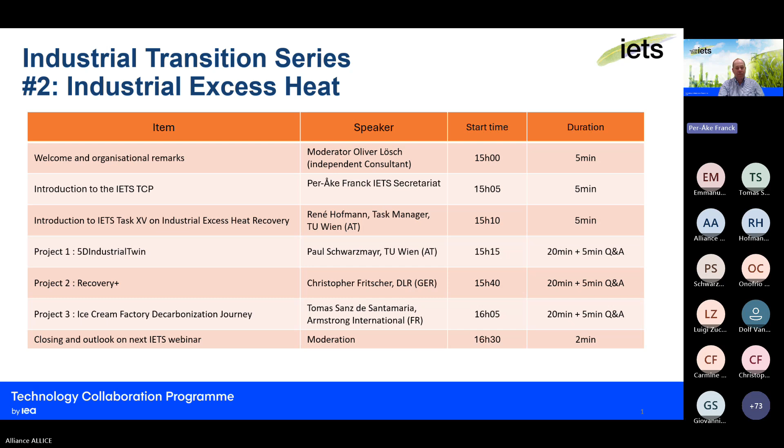Yes, hello everybody. I'm Per-Åke Franck from the Secretariat of Industrial Energy Related Technologies and Systems. Together with me at the Secretariat, Helen Johansson is also active. IETS is an IEA technology collaboration program, which is a global network for industrial collaboration.

The TCPs are a unique network that brings together various groups to support energy efficiency and decarbonization. There are about 40 TCPs under IEA, and we are the only one focusing on industrial application. Our work is organized in tasks, and the tasks are either technology-oriented or system-oriented. For the moment, we have 9 tasks running.

The oldest one is industrial-based biorefinery towards sustainability, which focuses on integrated biorefineries, and ongoing work is to deliver decision support tools. Then we have industrial excess heat, which René will soon go into detail about. Then we come to a technology-oriented task, which is membrane processes in biorefineries, aiming to create biorefinery concepts utilizing membrane separation as a technology to produce biochemicals and biofuels.

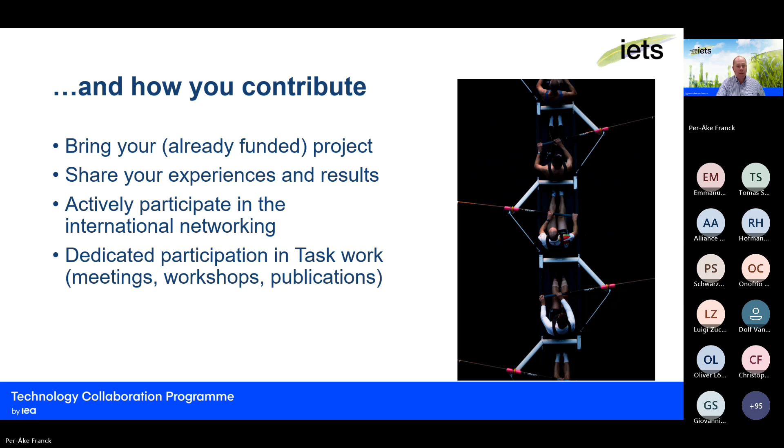The chair is Johanna Mossberg, our vice chairs are René from Austria and Lavinia from Switzerland, and the secretariat is myself and Helene Johansson. Thank you.

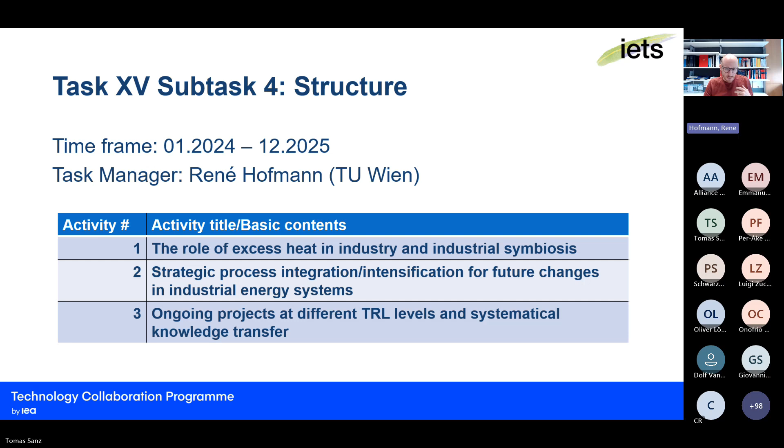So what does this mean? In activity 1, there is the motivation about industrial symbiosis, because this is not only about industry itself, but a fruitful interaction between different sectors. We have demand response, domestic heating, power to heat, power to X, as you know already. And the question is, this is a holistic system, and how our excess heat is also active if the system boundaries change.

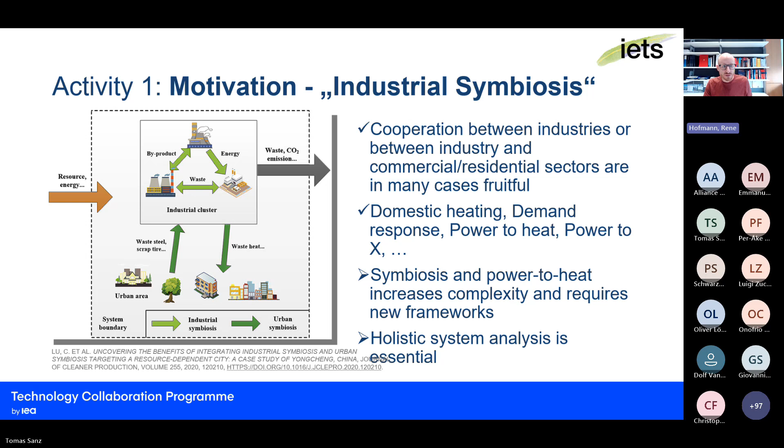The second is the activity about avoiding lock-in effects, because we already know a lot of different process integration methods, meaning pinch analysis and also mathematical approaches. We know there is a rough pinch analysis, meaning we go first through estimation steps and then more into detail. This is very well established.

The question is how to make those technologies or methods available for putting new technologies into the systems, avoiding any lock-in effect, meaning that if the system boundaries change, the question to be answered is: if we invest in a different technology, what does it mean at the end?

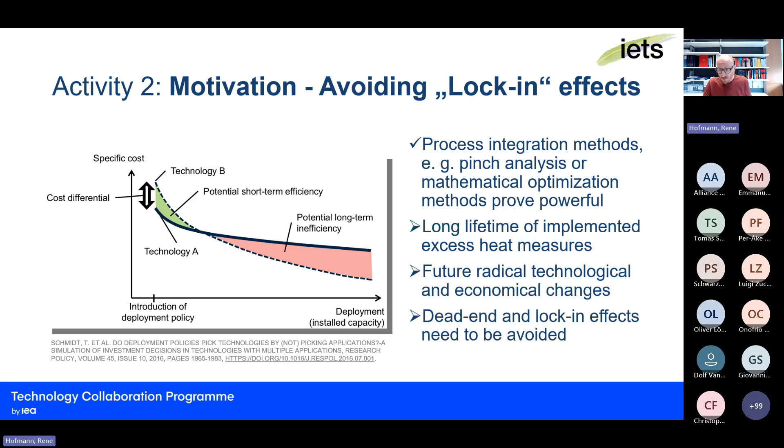Then we have activity 3, which is the systematic knowledge transfer, because this is a 10-year task from the starting point, and we are now in the 3rd phase, meaning we are in subtask 4. That means there are a lot of different projects brought into this activity, and what we are doing is trying to develop a systematic knowledge transfer out of it.

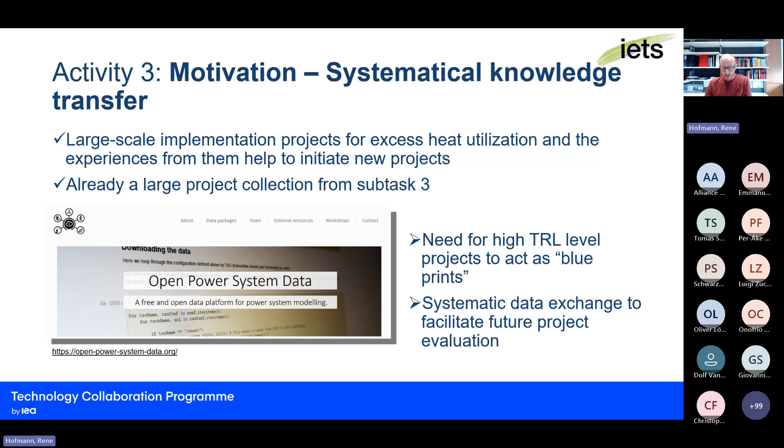We had a midterm meeting with our industrial partner ArcelorMittal in Maizières last March, where we had 2 workshops about uncertainty and risk for strategic process integration, and the introduction to new technologies and systems.

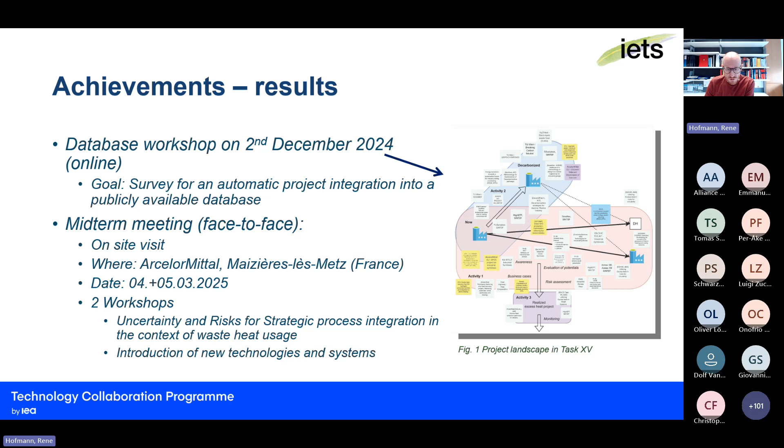So far we have a lot of different achievements, meaning we had project sessions on the project level side, which you can find on the YouTube channel, also available on the webpage, as Per-Åke has shown already at the IETS. We also have an ongoing survey where we are collecting different projects into a database.

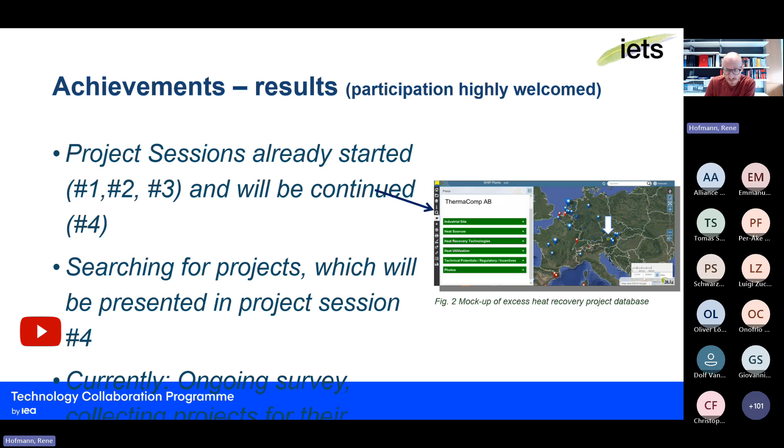And we are planning a workshop at the end, which is in parallel with the 41st ExCo meeting in Vienna in November. Yes, this is it from my side. Thank you very much. If you have any questions, I'm happy to answer.

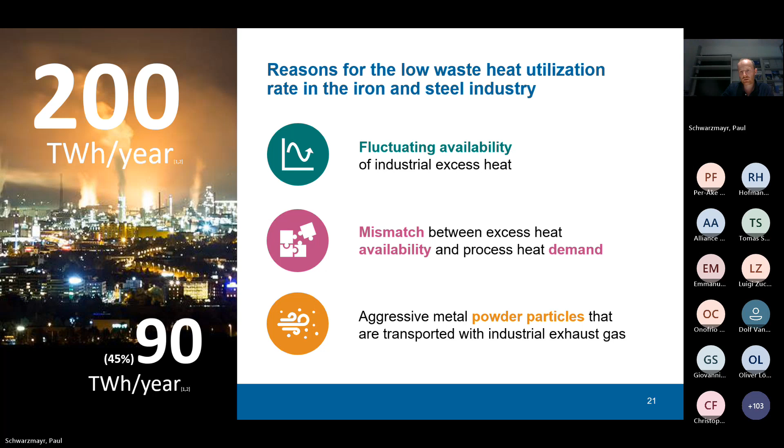You have an excess heat source which is highly fluctuating. Most of the time, for half an hour you have a lot of excess heat, and for half an hour you don't have excess heat, and then this repeats afterwards. This leads to a lot of exhaust gas losses after your steam generator, because it cannot follow this fluctuating excess heat availability.

So what our plan is, is to integrate thermal storage systems into these excess heat or waste heat recovery systems to smoothen out this excess heat availability by storing some of the heat when it is available in the storage, and using this stored heat afterwards to close the gaps when no excess heat is available.

This way you can smoothen your excess heat profile and therefore increase the utilization rate from initially 45% to theoretically 97% of the available heat.

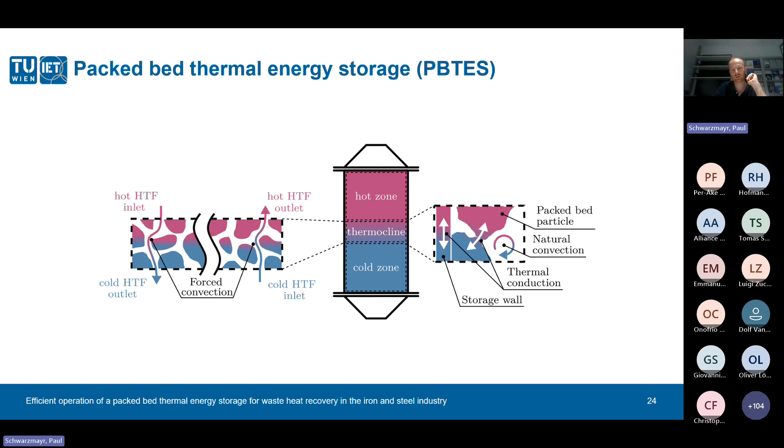So what we did in our project 5D Industrial Twin the last 3 years is we investigated two main things to investigate the efficiency of these packed bed thermal energy storage for waste heat recovery in the iron and steel industry. The first part was we investigated the impact of gas powder two-phase flow on the operation strategies of these kinds of storage if they're integrated in the iron and steel industry.

Secondly, we investigated the thermal efficiency, which is characterized by the thermocline degradation when the storage is integrated in industrial energy systems.

For this purpose we built two different test rigs. The first one was a cold model test rig to investigate the gas powder two-phase aspects, like how much powder deposits during charging, how much powder that was accumulated in the storage in the first place is entrained during discharging with clean air, and whether the accumulation of powder particles inside the storage was uniformly distributed over the whole packed bed or concentrated in some areas.

On the thermal efficiency part, we built a hot test rig. This test rig on the left has a diameter of approximately half a meter and is 2 meters high, and there we investigated the impact of the heat transfer fluid flow direction on thermocline degradation and energy and exergy efficiency.

So we were interested in the question, what happens if, instead of charging the storage from the top and discharging it from the bottom, we charge it from the bottom and discharge it from the top? This was the main research question that we wanted to answer with this test rig.

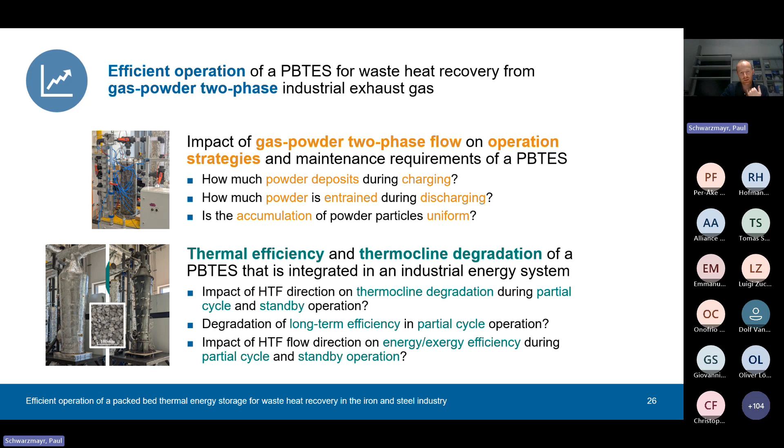Let's directly jump to the first aspect, the gas powder two-phase flow.

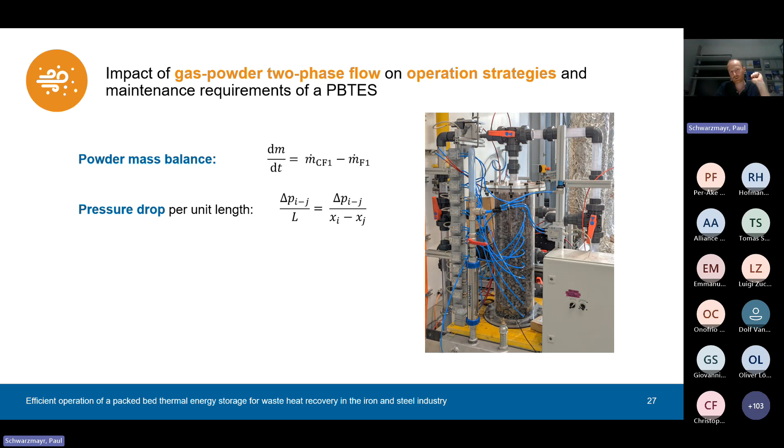We built this test rig to measure the powder accumulation inside the storage, which we did by measuring the amount of powder inserted at the first place, and then the amount of powder found in our filters after the packed bed. With this, we could calculate the amount of powder accumulated inside the packed bed during a charging process. We also wanted to know the location at which these powders accumulated, so we installed a lot of differential pressure sensors to investigate where the most pressure drop happened during charging with gas powder two-phase flow.

The results of these investigations were that when charging with gas powder two-phase flow, actually all of the powder introduced into the system accumulated inside the system, and the cold exhaust gases that exited our storage during charging were basically clean. The same happened when discharging with cold air - basically no powder accumulated in the packed bed during the preceding charging process was entrained by the fluids, so the heat transfer fluid stayed clean during discharging as well.

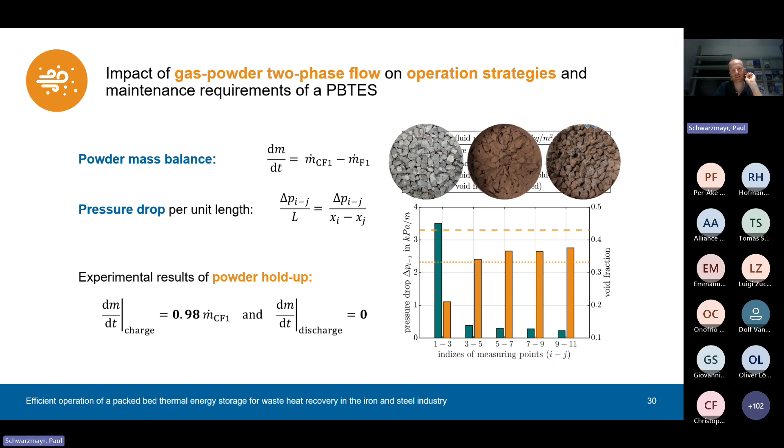We also took some pictures of our investigations on the top. The left picture shows the packed bed from a top view after filling the storage. The second picture shows the packed bed after charging with gas powder two-phase flow, and you see there's a lot of powder accumulated on the top surface. What we did then is we removed the upper part of our packed bed, approximately 10 to 20 centimeters, and there we found what was already indicated in our data - that the rest of the packed bed wasn't quite as contaminated as the top surface, which confirmed our experimental data.

To summarize the findings of our gas powder two-phase flow investigations: we found that 98% of the powder deposited inside the packed bed during charging, none of the powder was entrained during discharging, and most of the powder particles that accumulated inside the packed bed were found at the top surface at which the gas powder two-phase flow entered the packed bed.

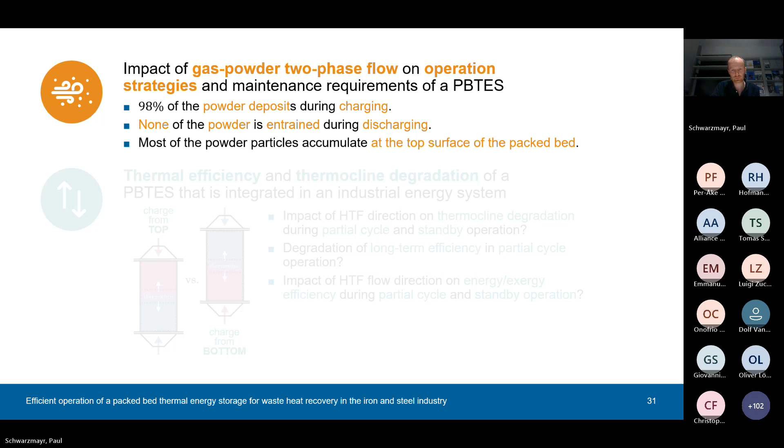That was the gas powder two-phase flow aspects. As already mentioned, we had further research questions to answer concerning the thermal efficiency of our packed bed storage. There we focused on two different operation strategies: on one hand a standby operation, which means you charge the storage once, let it sit for a long time, and then discharge it after, say, one day. The second operation strategy was the partial cycle operation, which means the storage is basically charged to 50% most of the time, and you're just cycling it around these 50%, between say 40 and 60%, in very fast batch processes.

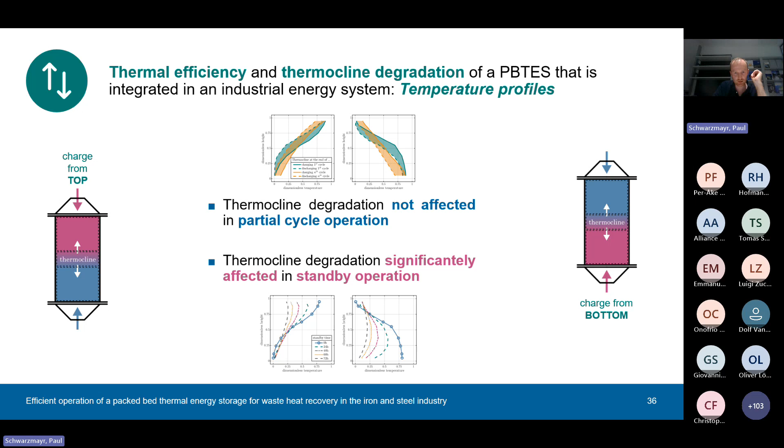So now let me just skip a few slides with too much detail and jump directly to the conclusion of our findings. You already saw the findings of our gas powder two-phase flow experiments, and in the thermal efficiency experiments we found that...

And for the standby efficiencies, the values drop by much higher values, up to 18% lower exergy and energy efficiencies if charged from the bottom.

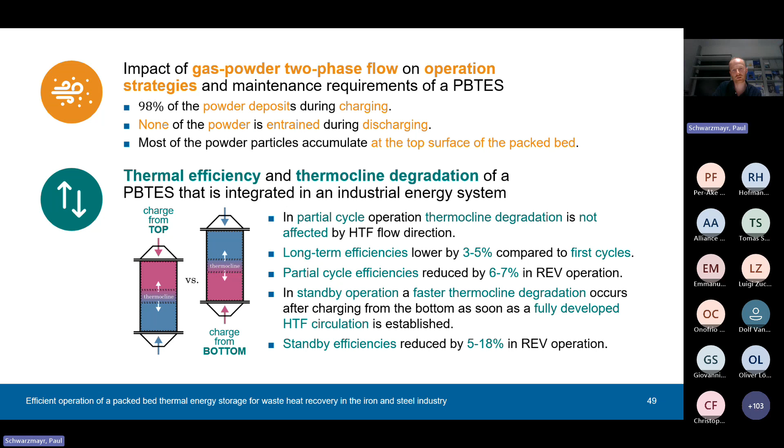So to conclude, we found that our storage does not only act as a thermal energy storage, but also as a dust separator, which is good and bad. We concluded that since the powders accumulate at the surface at which they enter the packed bed, it would be best to charge the storage from the bottom, because then you can use gravity to remove the powders from the packed bed.

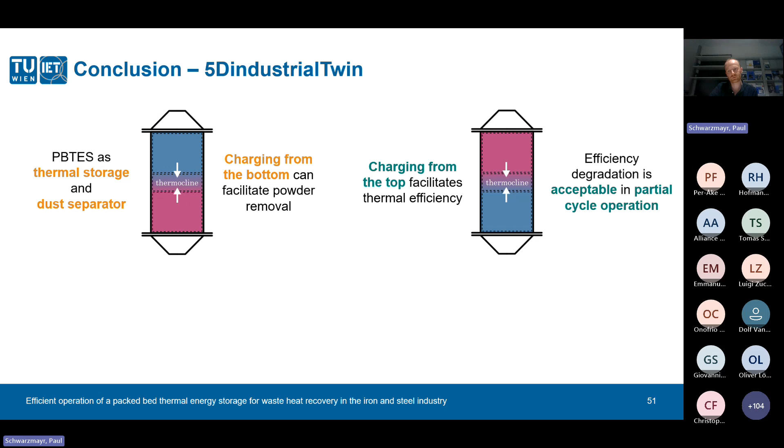However, we also found that, which is kind of obvious in terms of thermal efficiency, it would be better to charge it from the top rather than from the bottom. So we have two aspects that work against each other. Our idea for the follow-up project was to invent a new storage that can do both these things at one time.

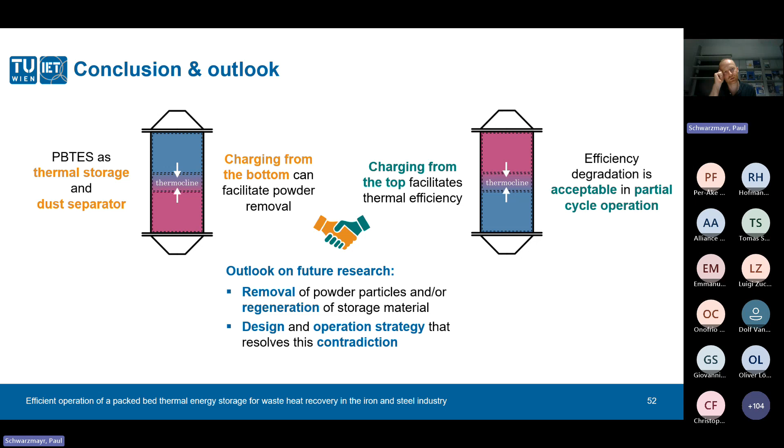What you can do then is charge the storage with hot gas powder two-phase flow. You inject this gas powder two-phase flow from the bottom, entering the packed bed from the bottom as you'd like it to separate the dust on the bottom surface. When the dust is separated in the first half of the packed bed, you divert your gas flow - now basically clean and still hot - and inject it into the outer part of the storage to charge this part from the top.

And when reversing the flow direction, you use cold air to discharge this part from the bottom. It also flows through the middle part and can be used in downstream processes to preheat stuff or to generate steam or anything else. So that's the basic idea we're researching in our new project, to see if the ideas we had actually work in real life.

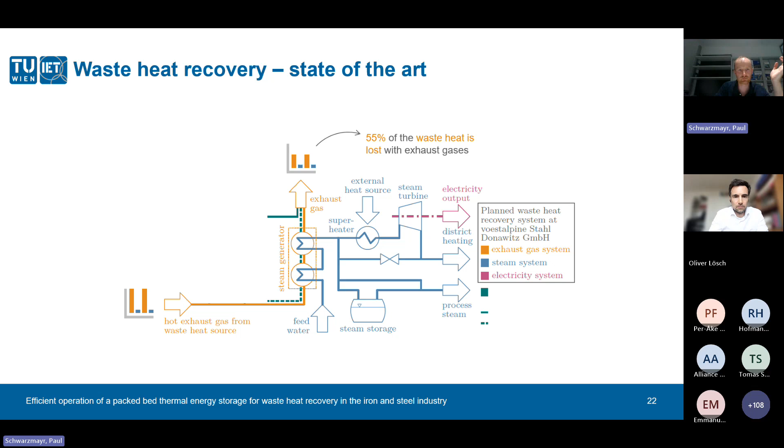On return on investment, I don't have a good estimation right now. But we set up an optimization model for our use case, where we first optimized the excess heat, or waste heat, system. This is an existing system of voestalpine at Leoben Donawitz, where the waste heat utilization rate with state-of-the-art systems was 45%, meaning 55% losses. By integrating a virtual packed bed thermal energy storage, our optimization model yielded a waste heat utilization rate of up to 97%, which is of course an ideal case, but still a significant increase. That's the result of this optimization model, and hopefully an answer to the question.

Thank you so much. Maybe one last one from me: do you have actual plans to go ahead in the direction of a concrete demonstration at a steel plant?

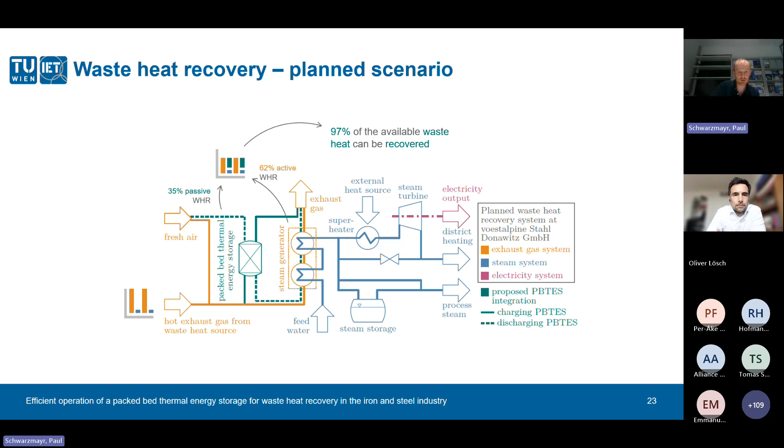Yeah, we actually do. We just started a project investigating the prototype of our new storage that I showed on the last slide. This project will last 3 years, where we try to answer some remaining research questions, like: is the powder separation in this configuration working well? Can we remove the powders in this configuration? There are still open questions, but if the answers in this research project are positive, the next step will be to implement a prototype at our project partner, maybe parallel to the existing waste heat system. But yeah, that's the goal.

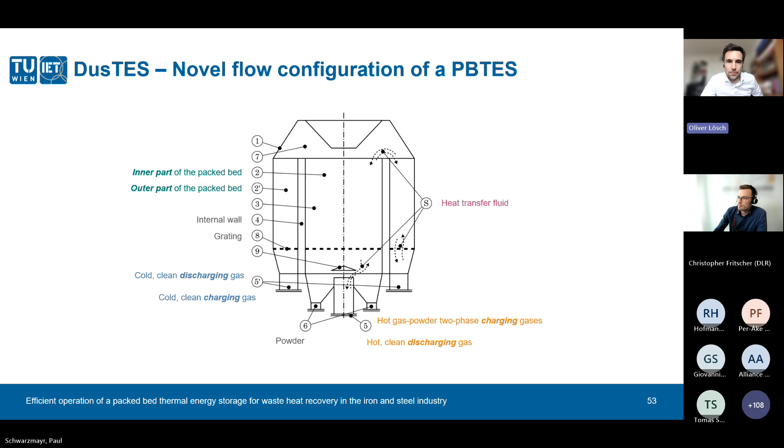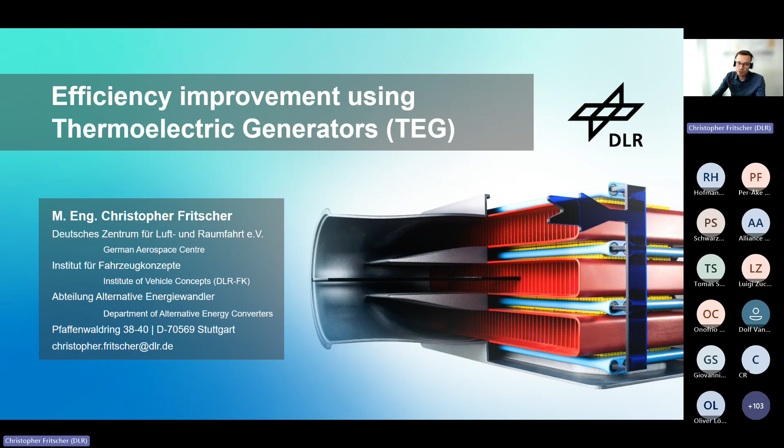My name is Christopher Fritscher. I'm a researcher at the German Aerospace Center for more than 4 years now, at the Department of Alternative Energy Converters, where we investigate if it is possible to improve efficiency by using thermoelectric generators. I studied mechanical engineering, and my responsibilities include structural mechanics simulations, design, prototype manufacturing, as well as experiments on our test rigs.

First, I want to start with a short introduction of the German Aerospace Center. We are a big research organization in Germany, divided into 5 activity fields. We provide research and technology transfer to industry in the sectors of aerospace, energy, and transport, and there are also big interdisciplinary sectors: digitalization and security research.

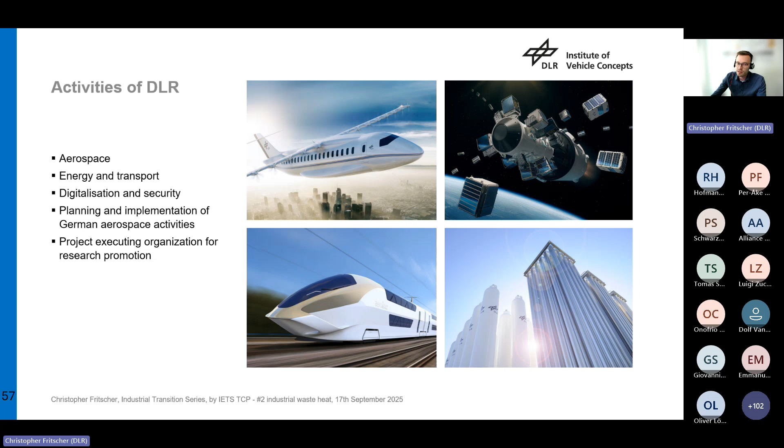Besides that, the German Aerospace Center is responsible for the planning and implementation of German aerospace activities on behalf of the federal government, and an independent project management organization for research promotion also belongs to it. In these 5 activity fields, more than 11,000 employees work at 30 different locations distributed across Germany, but also in Brussels, Paris, Tokyo, and Washington. Our headquarters is located in Cologne, and I am working from Stuttgart.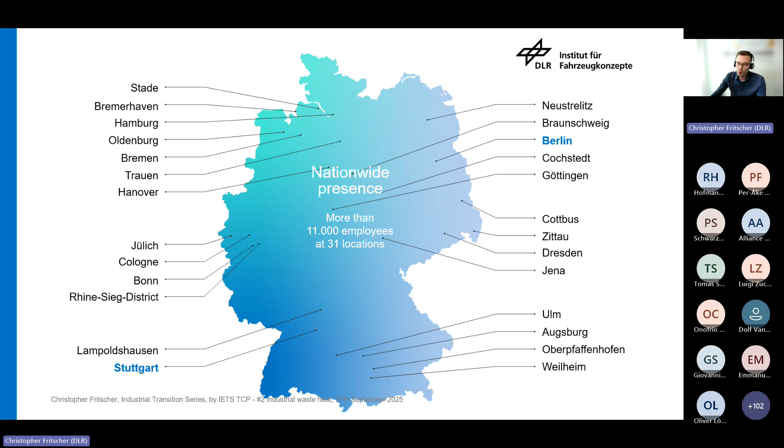But now, let me start with explaining our technology. Have you ever wondered where planet rovers like Curiosity on Mars get their electrical energy from? Because photovoltaics are too sensitive to dust, and because of its size it's not feasible, and batteries are no option because they have too low capacity for the whole lifetime of such a rover, the solution is radioisotope thermoelectric generators.

How do they work? You can see that on the right side. You need heat from a heat source, which is conducted through a semiconductor and dissipated into the environment via cooling fins. In the semiconductor, an electrical voltage is generated directly because of a temperature difference, with no moving parts. In such space applications, thermoelectric power generation has already been successfully used for more than 50 years now.

But nowadays, there are no relevant applications on Earth. I would like to show how it is possible to transfer this technology to terrestrial systems in the next few slides, and clarify if it is efficient to use such a system for industrial applications.

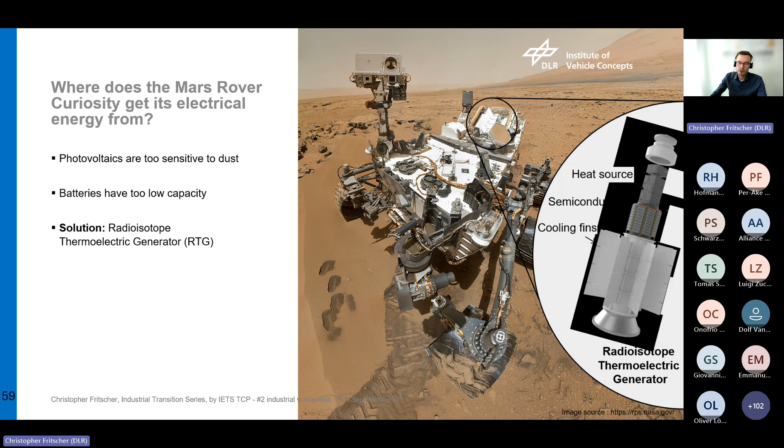The principle behind this, and the reason why it is working, is the Seebeck effect. It says if you heat up one side of a material and cool down the opposite side, you get a separation of charge carriers. Such parts we call a thermoelectric leg.

You can see here in the first figure that the charge carriers are moving downward. That's why at the bottom you can see much more electrons or electron holes, and this is the reason why you get an electrical voltage. You only need a serial connection of many such parts and you will get a usable electrical current.

Such a serial connection of thermoelectric legs is technically realized in a thermoelectric module, which you can see here in the second picture. In a technical system, you realize the required heat flux with different heat exchangers. Heat is fed into this system through the red heat exchangers, then conducted through the yellow thermoelectric modules, which are the same as in picture 2, and the blue heat exchangers return the heat and provide it for further use. This is called a stacked heat exchanger design.

The last figure shows how a prototype of a thermoelectric generator could look like. What you can see is the housing for maintaining an inert gas atmosphere and quite a lot of measurement equipment. All these heat exchangers from figure 3 are located inside this housing.

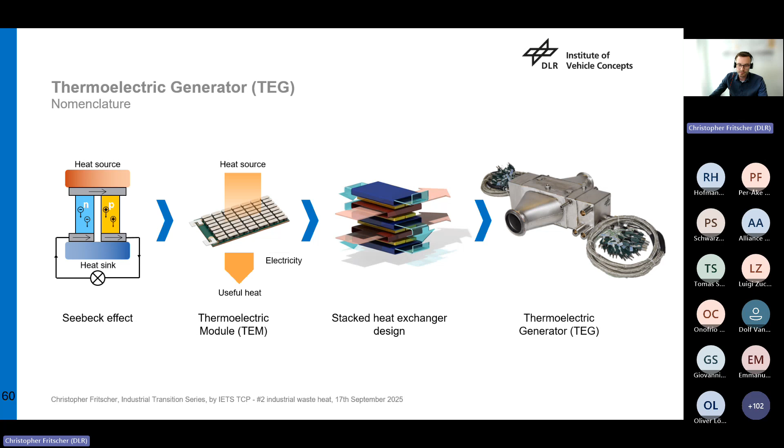What we are working on at the Institute for Vehicle Concepts is shown here in more detail. You can see the whole process from research of thermoelectric material to the integration into different applications. In cooperation with partners, companies, and other research institutions, we investigate suitable material and the fabrication of thermoelectric modules. Our key competence is the designing and developing of such generator systems.

In order for the technology to establish itself on the market for an economic use, we are already looking at how a serial production could look like, and the stability of generator systems. In the last steps, we are investigating the integration into different systems for different applications. In the past, we were already able to show the high potential of an economic use in different real applications.

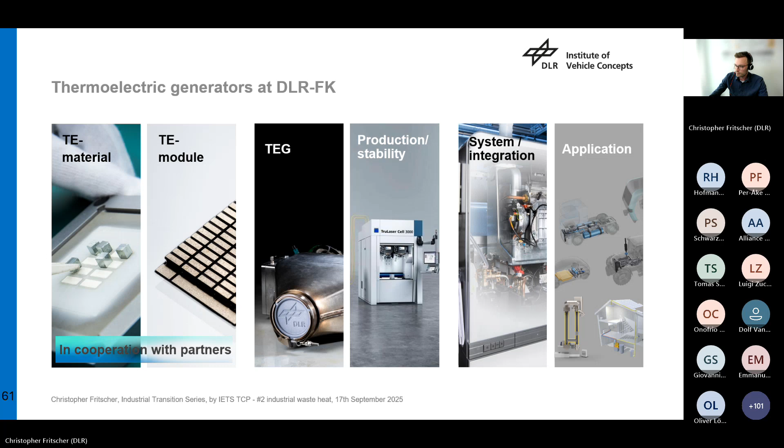The history of the research at our institute is shown here. For more than 20 years now, we are researching different applications of thermoelectric generators. In the first years, our focus was on car applications. Now we are also looking on commercial vehicles and industrial applications. Overall, we developed a highly integrated encapsulated design, and we have completed several full systems. A few of our partners from the past are listed here at the bottom.

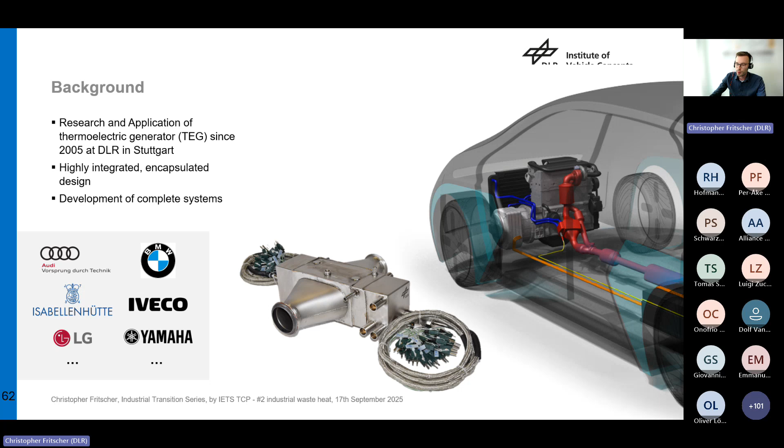Here you can see our progress in the last 20 years. I'm sorry for the few mistakes in the diagram. On the horizontal axis, the years are shown, and on the vertical axis, the power density is plotted. That's the electrical power output in relation to the weight of the thermoelectric generator.

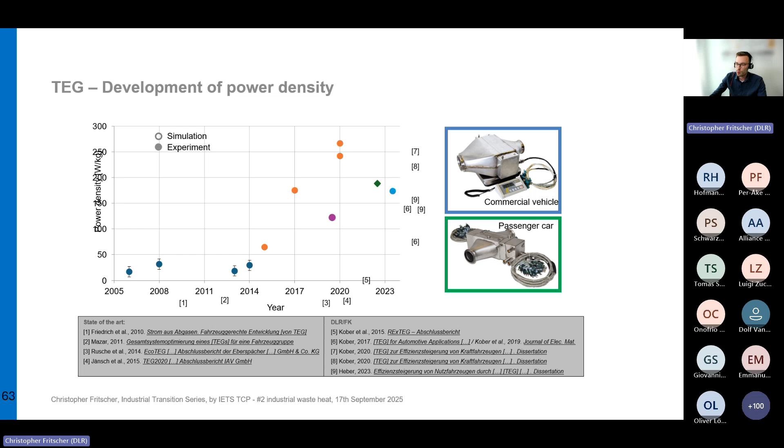Each dot represents a functional prototype of a thermoelectric generator. The ring circles are simulated designs, and the filled circles show real measured results. I think it is really impressive to see that we were able to increase the power density by a factor of 10 over the last years. This is the reason why now it is the right time for this technology.

Now I want to show you one specific application for industrial waste heat recovery. We have recently completed the research project Recovery Plus, which I want to explain to you now. The goal was to investigate the potential of such a generator at a zinc melting furnace.

The heat source is the exhaust gas of a melting furnace, which is operated with natural gas. The technical process parameters show a heat flux of approximately 66 kilowatts thermal heat. That means each year we have waste heat of over 350,000 kilowatt hours. We wanted to make this waste heat usable with a thermoelectric generator.

As heat sink, water from the normal heating system was used. So it was possible not only to use the generated electrical power, but also to use the heat. Instead of directly heating buildings, for other applications it would also be feasible to put the heat in a district heating system, or to use a cold absorption machine, or to use it for process heat.

On the right side, you can see the design of our prototype and how it was integrated in the production plant system. There you can also see a bypass, which is not necessary. It was only installed to minimize downtime in ongoing production during the installation of our prototype, and for any emergency cases.

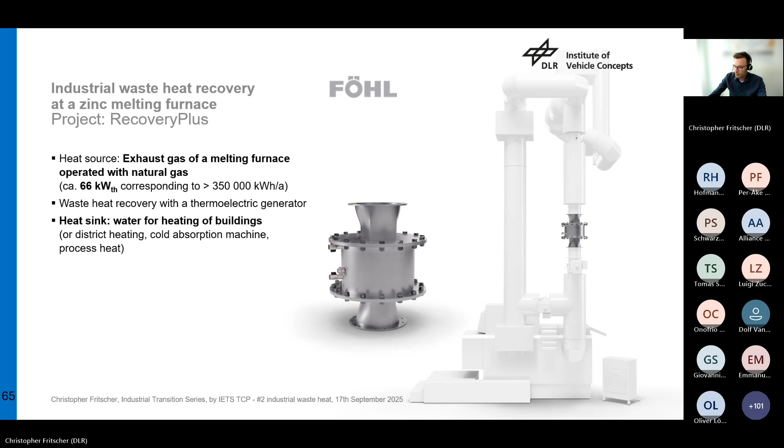Here, a few more technical details. The furnace is used for melting zinc ingots. Our project partner, the company Föhl, needed this zinc for the production of die-cast parts. The exhaust gas has a temperature of 700 degrees.

As I already mentioned, this results in a waste heat flow of 66 kilowatts thermal heat output. The furnace has an operating time of more than 5,500 hours per year, so you get more than 368,000 kilowatt hours of wasted heat. In the figure on the right side, you can see our temperature measurement for analyzing the temperature distribution in the exhaust pipes. This was necessary for developing and designing our prototype of a thermoelectric generator.

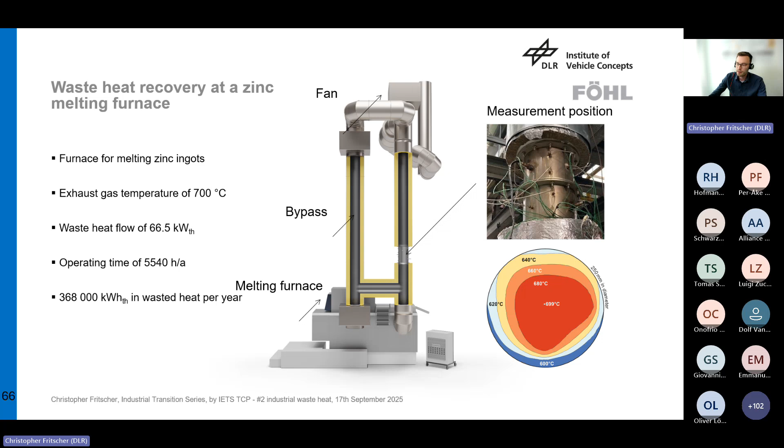So how does the generator work here? Of course, the hot side of the thermoelectric modules were heated up with exhaust gas. And as I already mentioned, the cold side was cooled down by water from the local heating network. So more or less, the thermoelectric generator is just an energy converting heat exchanger.

This you can see also here on the right side. In the furnace, the process heat is generated. This heat is on the one hand used for the melting process, and the rest of it, all the waste heat, is carried to the thermoelectric generator.

Here, a large percentage of the heat is provided as usable heat for water heating. Another option would be to use the heated water for steam generation or reuse it for process heat. And of course, part of the heat is transformed into electrical power energy. Because it is not efficient to cool down the exhaust gas to ambient temperature, a certain percentage is released into the environment via the chimney.

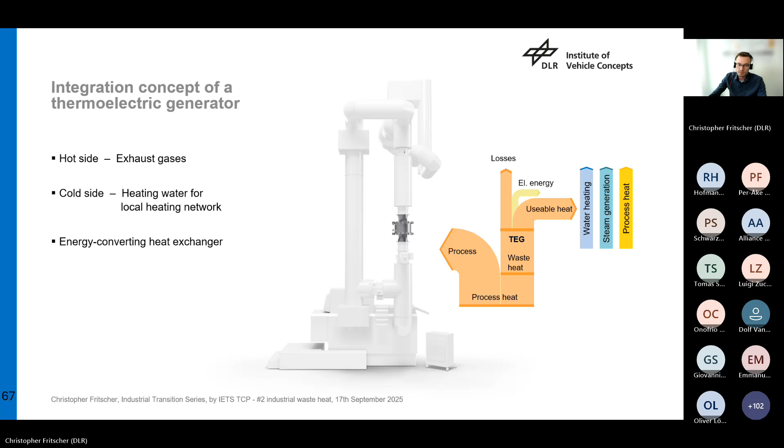Here you can see a photo of our functional prototype at our test bench. At our test bench, we did an experiment to validate the key figures and to compare them with our design and simulations.

On the left side, a hot air mass flow is generated and controlled. At the inlet and at the outlet of the thermoelectric generator, the pressure and temperatures of the airflow were measured. On the top, you can see the blue water pipes, where the mass flow, pressure and temperatures are also measured. In the generator itself, of course, the generated electrical power and temperatures at 60 different locations are measured.

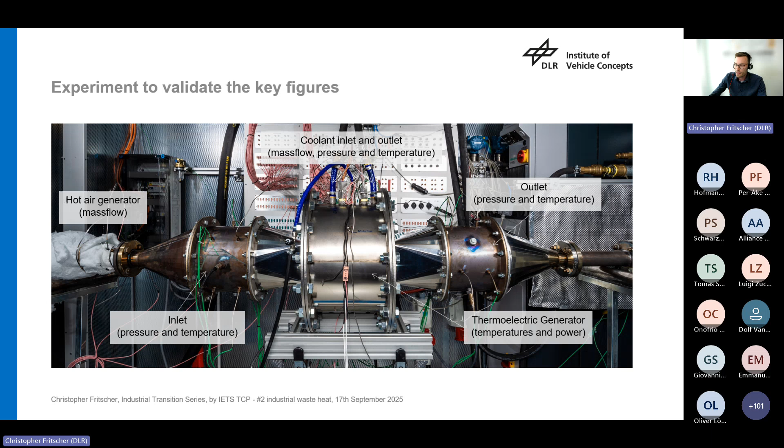Here are the technical data of our generator design. We reach an electrical power of more than 1000 watts. We provide 37 kilowatts of heat as heating water. The electrical power generation leads to more than 5,600 kilowatt hours per year, and the heat recovery leads to a heat saving of more than 205,000 kilowatt hours every year.

That means with the integration of this generator, you can save costs of more than 5,000 euro each year. And the manufacturing costs are less than 5,800 euros. For the calculation of the manufacturing process, we have assumed a production quantity of 100 pieces each year.

So we reach an amortization period of much less than 3 years and a reduction of CO2 emissions of over 35 tons each year. Just a little note: in the future, significantly higher electrical power output seems possible. In this research project, we were a bit restricted regarding the availability of thermoelectric modules, and we were able to identify some potential for improvements. Nevertheless, I would say these achievements are quite impressive.

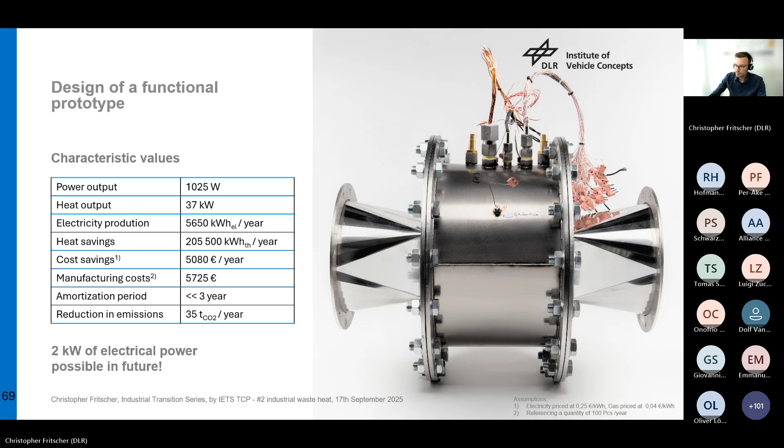Now I want to compare these results with other technologies. For example, for the same electrical power output in one year, you would need a big area for photovoltaics, because photovoltaics don't work at night, or if there are too many clouds. You would need a rectangle of 7 by 10 meters for the same power output. So if you compare it, the size of a thermoelectric generator is much smaller.

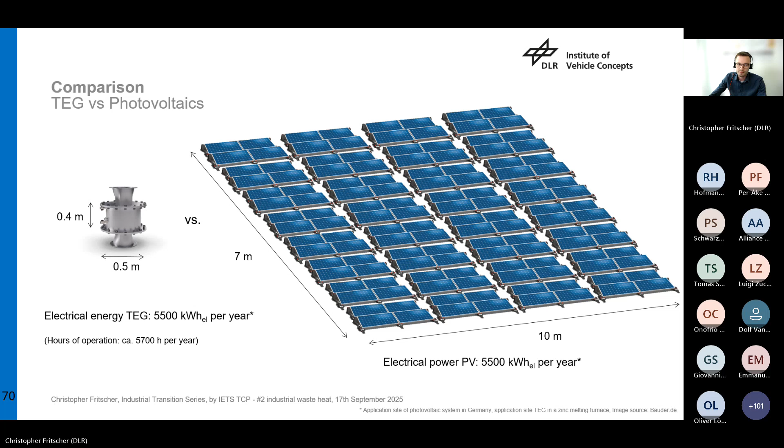After testing this prototype at our test bench, we had installed it at the industrial zinc furnace. So we generated real savings of costs and emissions at this company. And of course, it was a research project, that's why we identified further development potential. Here on the right side, you can see a few impressions from the installation.

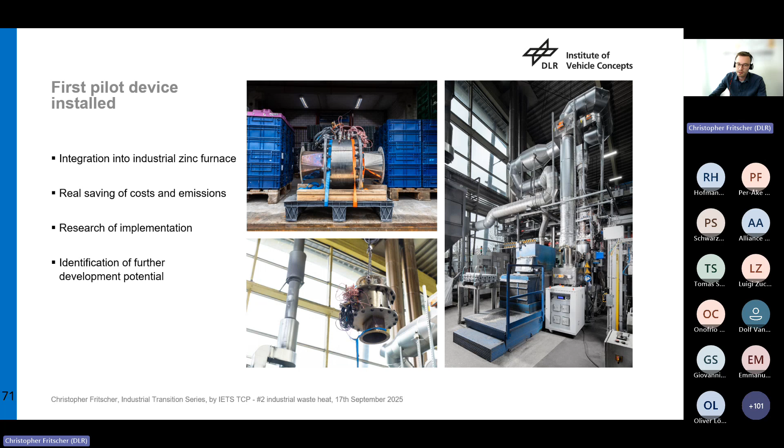To summarize and show the general potential of this technology for future applications: at a water outlet of the generator, we were able to provide a thermal power of 40 kilowatts heat. We reached an overall system efficiency of 3%, if you just look at the electrical power output. And like I mentioned, with a few little improvements, a significantly higher efficiency up to 6% seems possible, which would result in 2 kilowatts electrical power.

Altogether, we predict system costs lower than 4 euro per watt electrical power. Here, just the electrical power output is considered. Providing the heat is an additional benefit, which would improve the system costs.

Now I want to compare it to another heat recovery system, the organic Rankine cycle, which is already widely implemented in industry. The most difficult part is that today no systems are available for such small heat quantities. That's why you can see here values for small organic Rankine systems with 100 kilowatts and bigger systems with 500 kilowatts thermal power. The system efficiency for small systems is only slightly higher than the efficiency of thermoelectric generators. For bigger organic Rankine cycles, the efficiency increases.

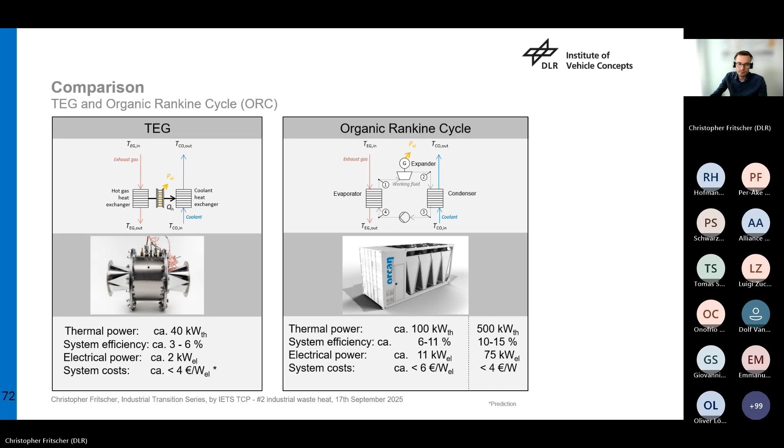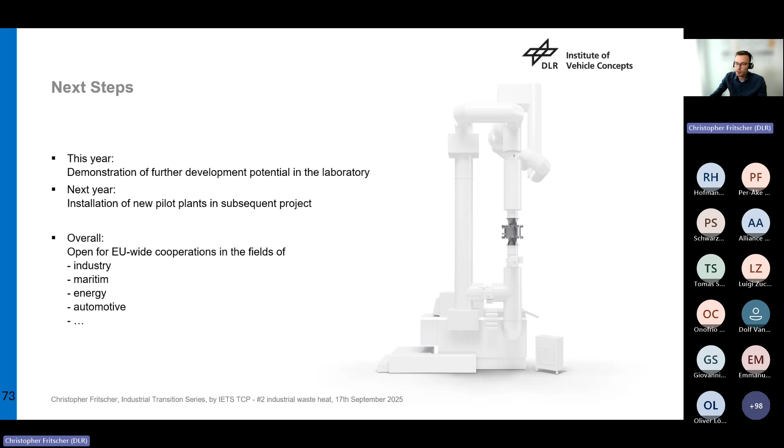What are the next steps for us? This year, we want to demonstrate the development potential in the laboratory, and for next year, the installation of several prototypes in new pilot plants is planned. This is part of a subsequent project where we want to show the potential of this technology for several stationary applications. Overall, we are open for new collaborations in very different sectors for future research projects.

And my most important message for you: thermoelectric generators are an economic solution for industrial waste heat recovery, especially for small volumes of heat, maybe even for higher amounts. It is the best technology on the market.

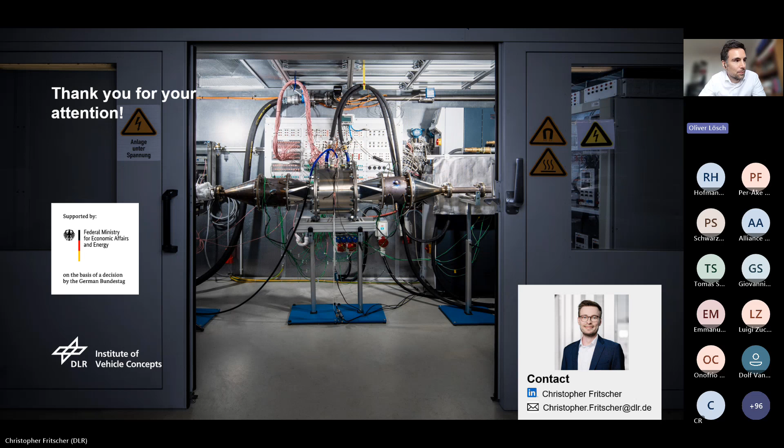Hello, everyone. Thank you very much for having me, and thank you to my colleagues. All their presentations have been very interesting. Now I'll introduce myself quickly. I am Tomas Sanz de Santamaria. I'm a thermal engineer, a Colombian living in Paris, and I have around 10 years of experience in heating and cooling systems. This is me in our factory in Stuttgart in front of our heat pump, one of our test heat pumps, which I'm going to talk about in a bit.

I work for Armstrong International. It's a company founded in the USA in 1900, 125 years ago, and we're a solution provider on thermal systems. We're also a heat pump manufacturer through our joint venture with Combitherm, which is a German company based in Stuttgart.

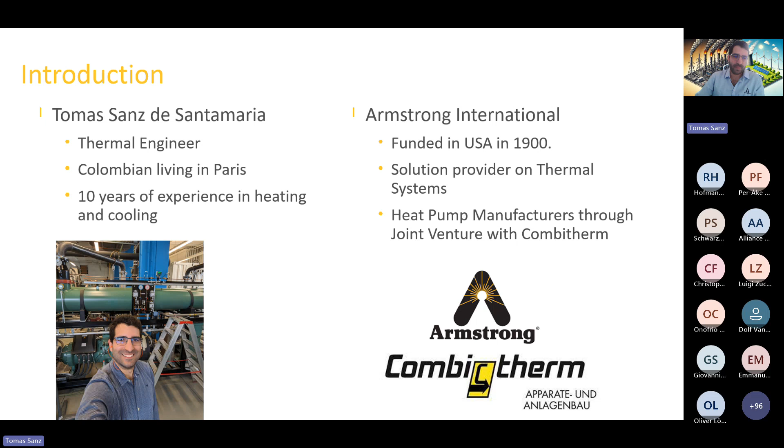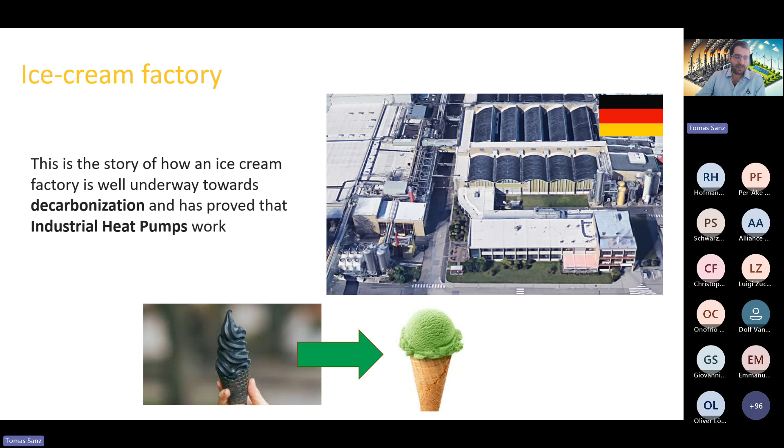Today I want to tell you the story of how an ice cream factory is well underway towards decarbonization, and it has proved that industrial heat pumps work. This ice cream factory is in Germany, and if you could see in the ice cream all the carbon it takes to turn your ice cream into the delicious snack you take, it would look like that. We want to help them move towards a greener ice cream.

Along the way, they have taken 3 key steps towards decarbonization. The first was to fully de-steam their system, and they turned into a hot water loop at 105 degrees. A while ago, they had their steam boilers providing all the heat for their users, and they switched to hot water. This was very important. You're going to see in a while why.

Then they also did direct heat recovery wherever possible. This is something every factory should strive for, to try to do direct heat recovery in their processes. And the final step, which is the one we're most proud of because it's the one we helped them do, was to install their first heat pump. Here's an image, the red box there next to the hot water tank, and the image on the right is the inside of the heat pump with the compressor.

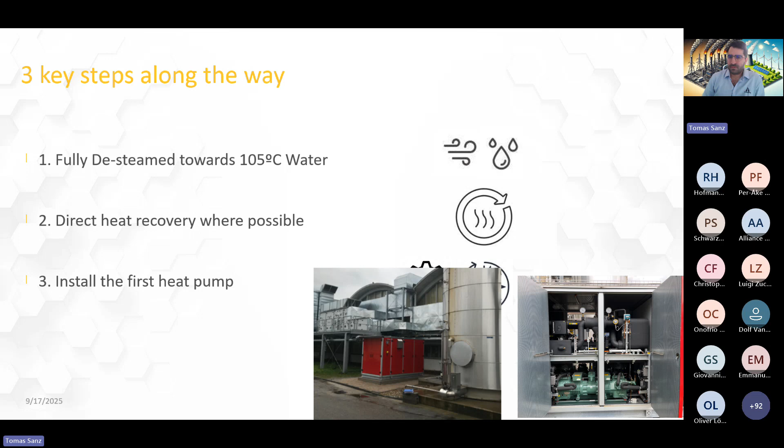So they installed it about 3 years ago, and about 5 years ago, and it's been running since, and they're very happy with it. But something that triggered the de-steaming, which was the first good thing that they did, was the installation of a combined heat and power system.

Many of you might think that this might be a step in the wrong direction. They were going to increase their gas consumption to produce electricity and heat. This would be the Sankey diagram of the system before installing the combined heat and power. They would take in gas, burn it in the boilers to produce steam for their users. And parallel to this, they would get electricity from the grid and use it in their users.

After the installation of the combined heat and power, they increased their gas consumption, part of it to the boilers, part of it to the combined heat and power to produce heat and electricity, which led to a reduction in their electricity purchase from the grid.

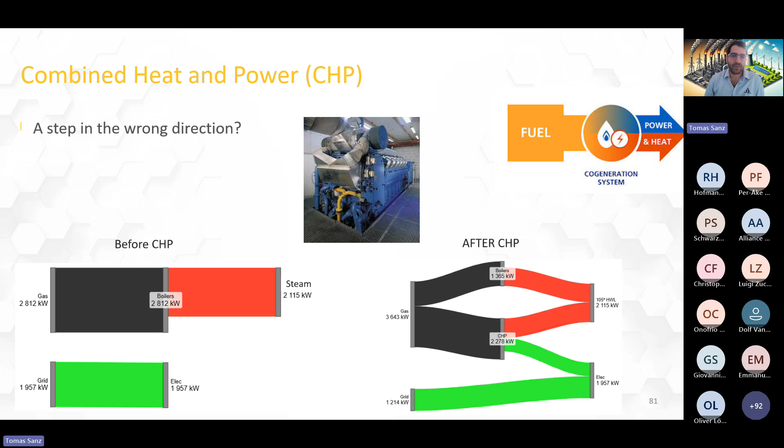But something that we need to remember is that in 2008, when this CHP was installed, the carbon intensity of the electricity grid in Germany was very high. It was 525 grams of CO2 per kilowatt hour. As reference, natural gas is 200 grams of CO2.

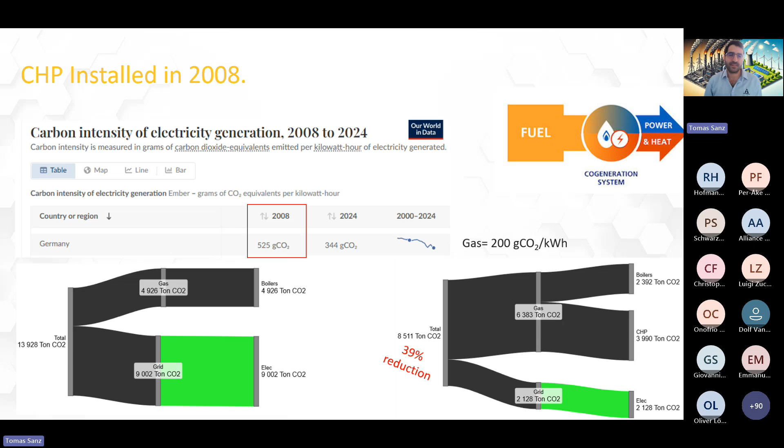So if instead of energy, we look at CO2 emissions, the total site consumption or site emissions were about 13,000 tons of CO2, part of it linked to the gas consumption of the boilers, but a big part linked to the electricity consumption of the grid. After the combined heat and power was installed, the grid consumption decreased, and yes, the gas consumption increased, but the total CO2 emissions were reduced by 39%.

And there were some unexpected benefits of installing the CHP. First of all, they de-steamed, because before the CHP, there was steam, and they said, okay, which combined heat and power system should we buy? One that produces steam or one that produces hot water? They noticed that the one that produces hot water has better efficiency because the return temperature of the water reduces the temperature of the fumes. And they said, okay, let's go for it.

And there are, of course, some other benefits to it, because when you remove the steam from the system, you reduce part of the maintenance because you have less steam traps to maintain, and the losses due to radiation are less because the temperature of the pipes is less.

Another unexpected benefit is that because of the German subsidies that they would get, they were having to shut down the CHP every so often because they had some excess heat that usually would be used for heating water. And because they were not being able to use all that heat, it would have to shut down. I'm going to explain this a little bit more in detail in a bit.

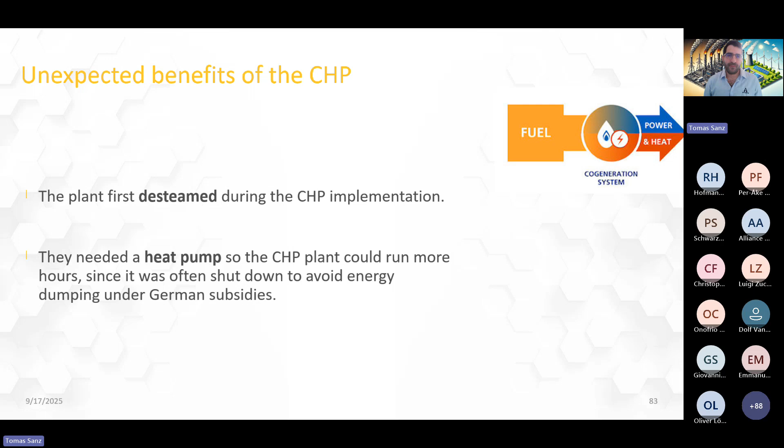Before that, let's take another look at the other step that they did. We talked about the de-steaming. Now let's talk about the heat recovery. As you can imagine, an ice cream factory demands lots of cooling. At the end of the day, you have to freeze your ice cream.

And for those of you who are not familiar with refrigeration systems, I'm going to do a quick recap. The heart of the system is the compressor, which is absorbing refrigerant, in this case ammonia, from the evaporators. It goes out very hot, passes through the cooling towers, the condensers, comes out as liquid, enters the evaporators again, gets evaporated, and then is absorbing all the heat from the factory.

Now, these systems are installed everywhere. In many factories, you'll see them. And here there are three main points where you can recover heat. Two points which are high, or let's call it medium temperature. The desuperheater, where you take the refrigerant that is coming out of the compressor at a very high temperature, and you can reduce its temperature without starting to condense it. You can also recover heat from the oil that is used to lubricate the compressor. So these two systems are, let's call it medium temperature heat recovery, between 50 and 70 degrees.

And then there's a lot more heat. There's more amount of heat, but at lower quality, lower temperature, which is the condensation of the ammonia. Most systems condense the ammonia with ambient cooling at around 20 or 30 degrees with cooling towers, but you can also put a heat exchanger and get a water loop at around 25 or 30 degrees.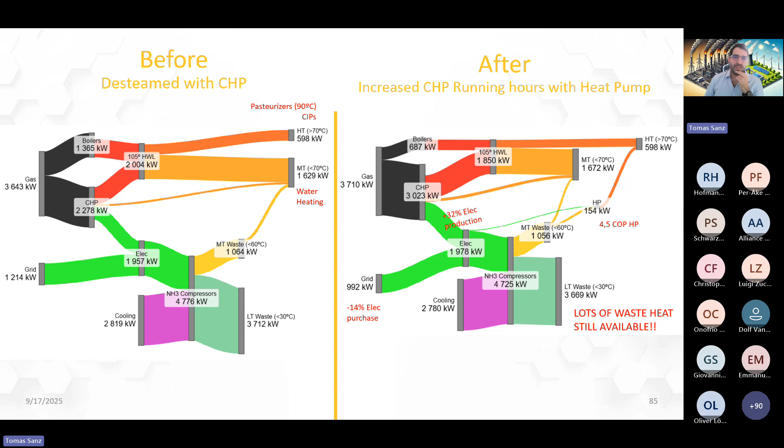Before that, let's ask ourselves the question: this heat pump was ordered in 2019, about 11 years after the CHP was installed. Did it still make sense in terms of CO2 to install this heat pump and increase the operating hours of the combined heat and power? Germany had gone a long way, from 525 it went down to 390 grams of CO2 per kilowatt hour of electricity.

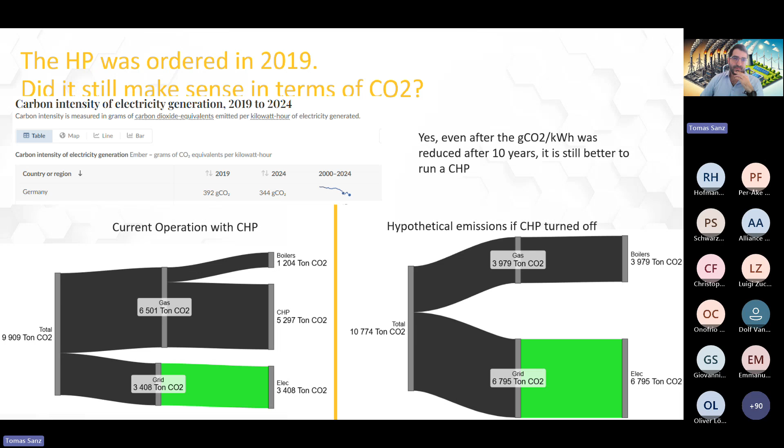But if we do the same exercise we did a bit ago, we see that the current operation with CHP still has less emissions than if we had switched to only boilers. Only boilers would make an increase in CO2 - very little, where the carbon intensity is going down in such a way that it's very close to not needing to run. And in fact, this is what happened recently: the factory established a green power purchase agreement, making their grid electricity now 0 grams of CO2 per kilowatt hour. With this, it doesn't make environmental sense to keep running the CHP and keep burning more gas.

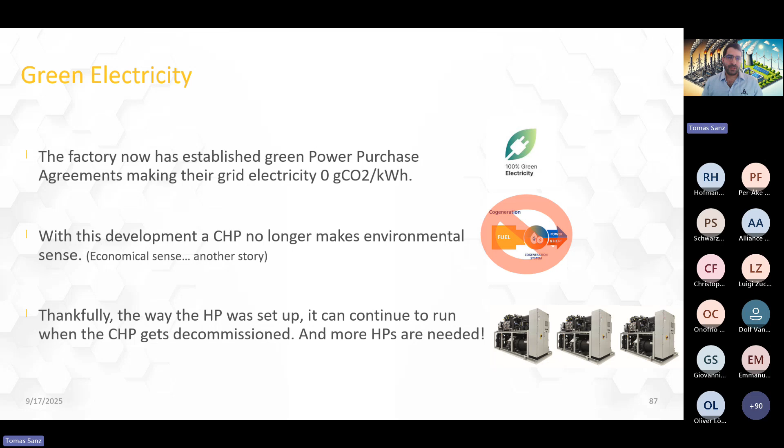Economical sense is another story, because electricity prices and gas prices are what would drive this decision. Now that this electricity is greener, we could turn off the CHP, and the way we set up the heat pump, it can keep taking heat from the ammonia coolers and not the CHP, so it could continue to run. And we can now install more heat pumps to fully decarbonize the site.

So going back to how we're running today, before decarbonizing in the future, we have it like this. And our proposal to the site is to move to this. Isn't this beautiful? No black gas lines, only electricity, green electricity. The electricity would come, feed the ammonia compressors, which do their cooling as they have to, provide the medium temperature waste heat and the low temperature waste heat. We keep on running the heat pump we already installed.

We would install a new high temperature heat pump, almost the same characteristics as the existing one, which would take the medium temperature waste heat it needs to provide the remaining heat for high temperature needs, pasteurization and everything. We would also install a medium temperature heat pump that would take electricity and the medium temperature waste heat, but the available medium temperature waste heat is not enough for all the medium temperature needs. It would need to take some of the low temperature waste heat, which is at less than 30 degrees.

Which is why the COP of this heat pump is not as good as the one from the high temperature. High temperature is at 4.5 and the medium temperature is at 3.7. And still, there is lots of waste heat available. If the site wanted, it could eventually add another medium or high temperature heat pump and sell the excess heat to a district heating system or something like this.

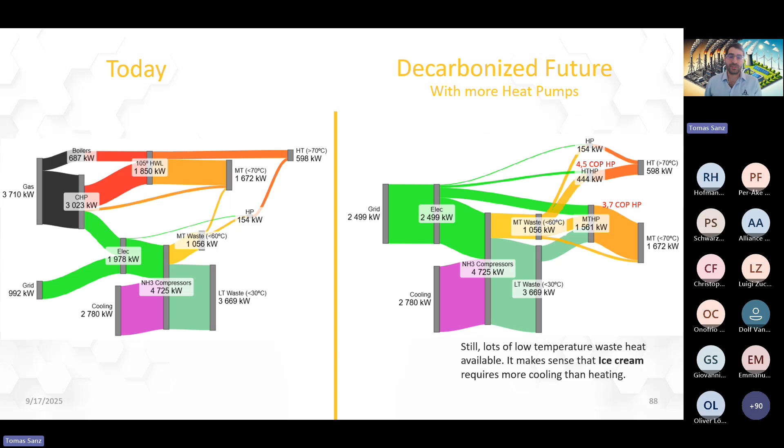Now let's zoom in a little bit on the heat pumps themselves, and talk about their technology and their operating limits. This is what we call the operating envelope for our heat pumps. We have several, but two main working fluids. We work with HFOs, and this is the R1233, which is capable of reaching 120 degrees on the hot side, but it can only cool down to around 35 degrees on the cold side. So this is the operating envelope it has. This is the temperature of the heat source, and this is the temperature of the heat sink. The high temperature heat pump we saw in the example previously would be operating around here.

It was producing 90 degree water, and it took as source water at around 60 degrees. The medium temperature heat pump is operating around here. It was taking water at around 25, 30 degrees because it had to tap into the low temperature waste heat, and it was producing 70 degree water.

The COP, something moved a little bit here in this graph. I'm sorry about these weird lines, it was not like this in my presentation. So ignore these diagonal lines.

This is the COP of the heat pump, depending on the leaving water temperature of the condenser, the hot part, and the leaving water temperature of the evaporator, the cold part. As you saw initially, the site was working with a 105 degree hot water loop. So if we had wanted to produce 105 degrees here, with the source that we had, which was around 60 and 45, we would have a COP which is not that good, around 3.7.

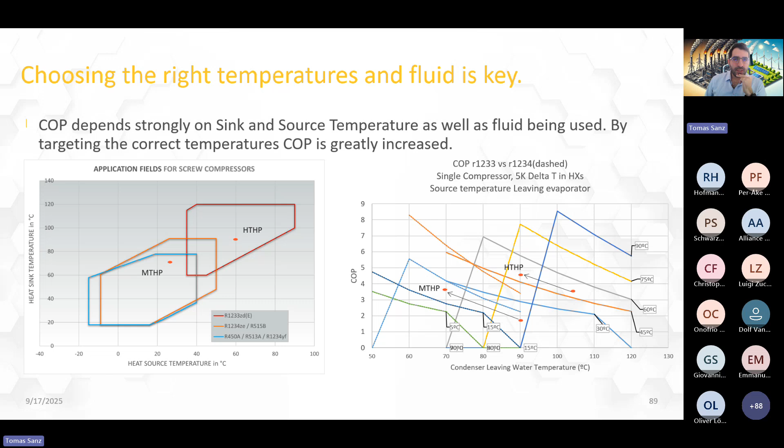And it's a shame that this diagram is not the one I have, because the one I have has dashed lines for the R1234 refrigerant and solid lines for the other one. So yeah, something went wrong here in the passing from one part to the other.

Now, this factory in particular didn't need steam, which made things a little bit easier. But if the site had needed steam, we still offer a solution to produce steam with these high temperature heat pumps. As you saw in the previous slide, our heat pumps can reach up to 120 degrees in the condenser. If we take this 120 degree water and pass it through a steam evaporator, we can produce low pressure steam up to 0.7 bar. And if we need higher pressure than that, we can pass it through a steam compressor, a mechanical vapor recompression system. We don't make those ourselves, we make the heat pumps and the steam evaporators, but we work closely with some third parties to integrate the mechanical vapor recompression and go up to 180 degrees Celsius steam, up to 4 tons per hour.

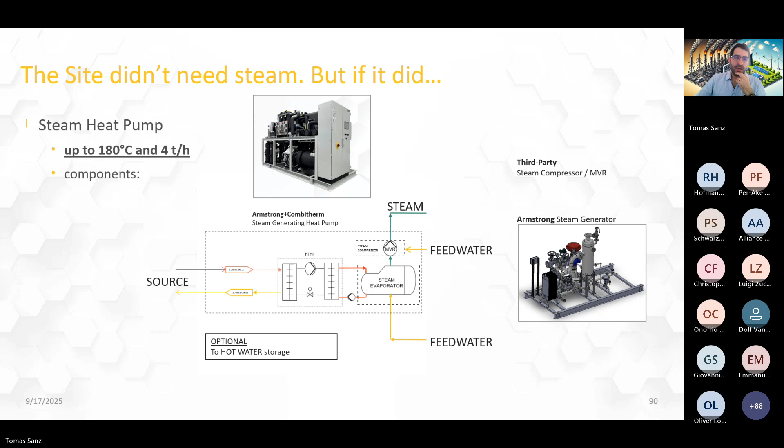So in conclusion, this factory now knows firsthand that these heat pumps work, have had these heat pumps running for 5 years, and are making gas savings and allowing their combined heat and power to run more. But each factory is different, and careful engineering needs to be done for correct integration. Sadly, I have seen in other factories heat pumps that were bought, but since they were not correctly integrated, they were just not running.

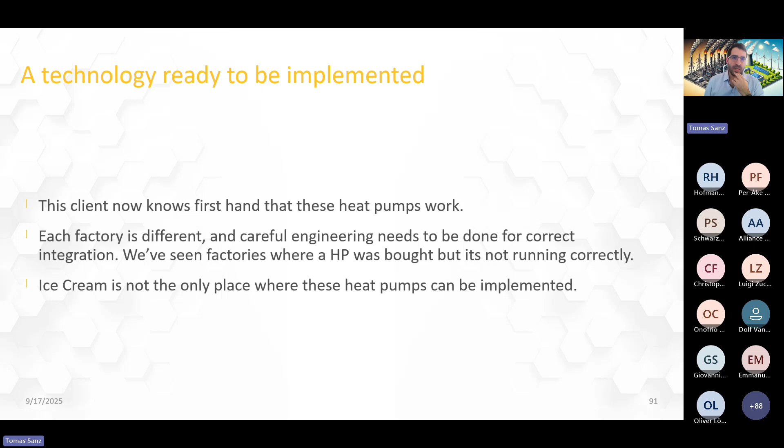And another point, ice cream is not the only place where these heat pumps can be implemented. I'm going to show you a couple of examples where we've installed them.

Cargill, which produces food for fish, for salmon, in Norway, integrated our heat pumps in their dryers. They have to dry the food. There's a really cool video on YouTube if you look for it, with more information about this project. Basically, they're taking the exhaust air from their dryers, which comes out humid and hot, and they need to heat it up usually with 120-degree water.

So we took the exhaust air as a source. We cooled it down with a 50 and 40-degree water loop, and the condensate would then go out a little bit colder into the atmosphere. The heat pumps then would consume a little bit of electricity and bump up the temperature in this hot water loop to 120 degrees and be used to dry the food.

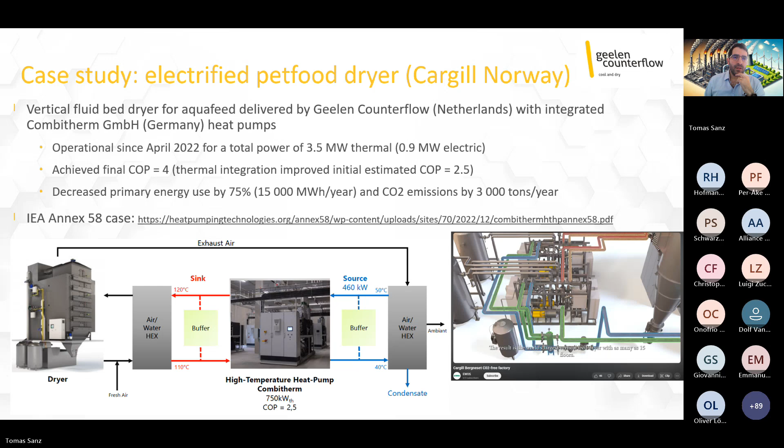Another integration we did was in a pharma company that needed to heat up their water for injection. Water for injection is the water that ends up in these little bags that you might get in your IV. As you can imagine, this needs to be very sterile to avoid any possible infection in the patients, and they need to keep it very hot at around 95 degrees to avoid any possible contamination.

They also have chillers on site used for cooling the production rooms. So we took the excess heat from those chillers, from the condenser of those chillers, fed it into our heat pumps. They installed 3 of them here, and it produced the hot water to keep the water for injection circuit hot.

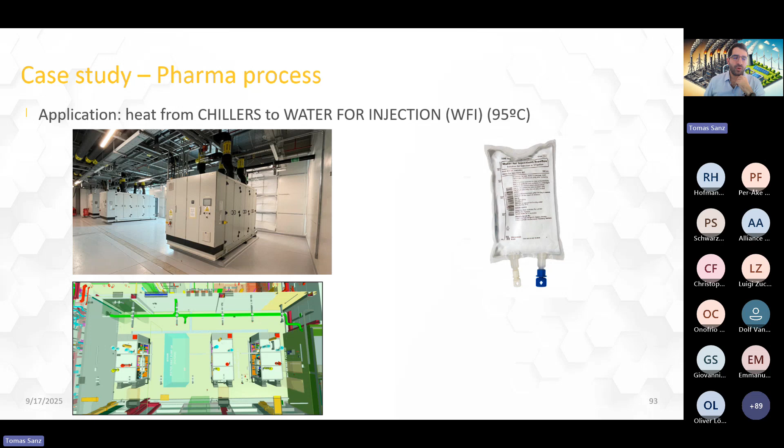So we have several installations. Here are just a couple of pictures. Each heat pump integration is its own story, and all of them are very interesting.

We, of course, have the control system in the heat pump, and the control system can be integrated into the factory's SCADA or management system. So you can remotely turn it on and off, change the temperature set point so you can run at better efficiency. Eventually, you could also do thermal storage: when you have cheaper electricity on the grid, make the heat pump run at higher temperature, and when the electricity is a bit more expensive, run it at lower temperature. But that's another presentation.

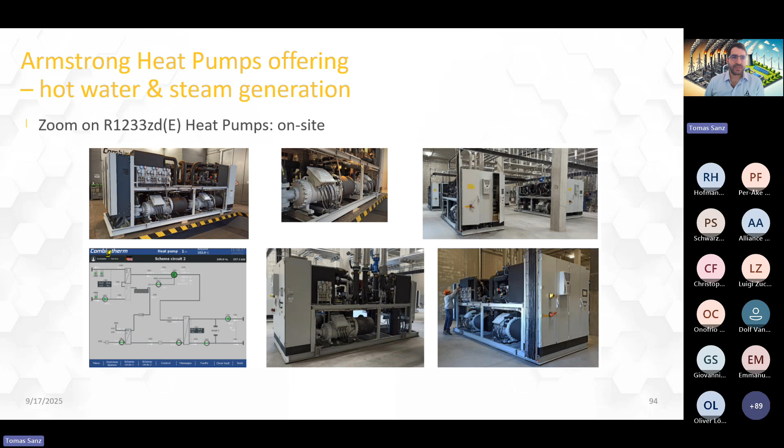In general, we have more than 100 heat pumps worldwide. We have a factory in the US, which is being built. We have built one in Mexico. We have a factory in India and in China. And we're building a factory in Belgium. There's already the original factory, which is running in Stuttgart.

This 100 heat pumps is equivalent to 50 megawatts of heating power installed. The average capacity of each of the heat pumps is around 700 kilowatts. And they've been installed, as you saw recently, in many different industries: food, pharma, labs, district heating. We've been doing this for more than 50 years. About a quarter of the heat pumps installed operate in the high temperature regime, which is from 95 to 120 degrees. And that's it from me.

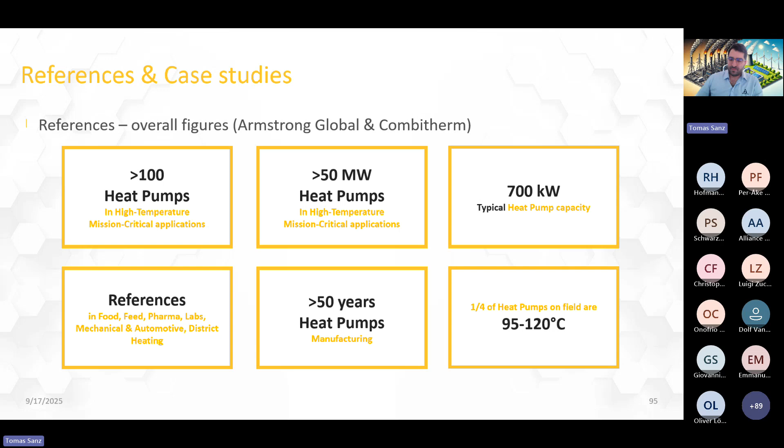Thank you very much. And now I'm open for your questions.

Thank you very much, Tomas. We do have some questions in the Q&A. We start with Gabriele, who wants to know if you have considered type 2 absorption heat pumps, and is there a particular reason for choosing electric heat pumps in that case?

Type 2 electric heat pumps, type 2 absorption heat pumps, also known as heat transformers, are great when you have a lot of waste heat and at very high temperature. I hope I'm not confusing it with type 1, but from what I remember, they're very good when you have a lot of waste heat at very high temperature, and you're only needing some heat at a lower temperature. Or was it the other way around? There was the other one, which is if you have very high temperature heat, but you're willing to split it. You can have very high temperature or medium temperature, split it, and then use a little bit of it at the high temperature. Yeah, I think those are the ones that are heat transformers.

I don't use absorption heat pumps often. I often get them confused, the type 1 and type 2. But for this application, using a type 2 would waste a big part of that already waste heat. You could bump it up with that and it wouldn't consume electricity, that's true. But there might not be enough waste heat to run it like those.